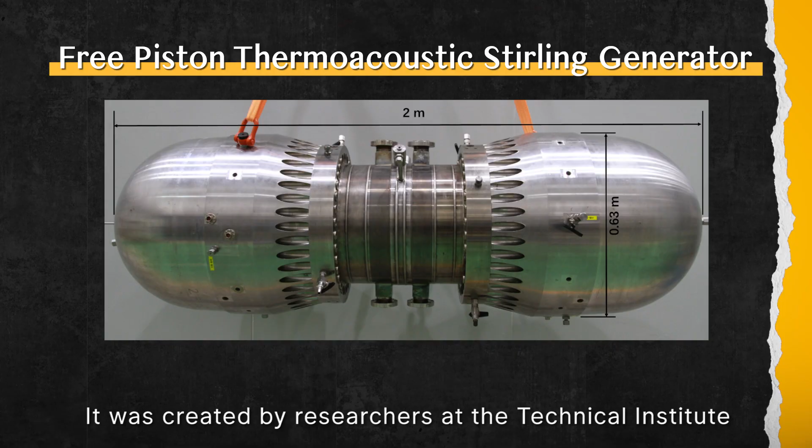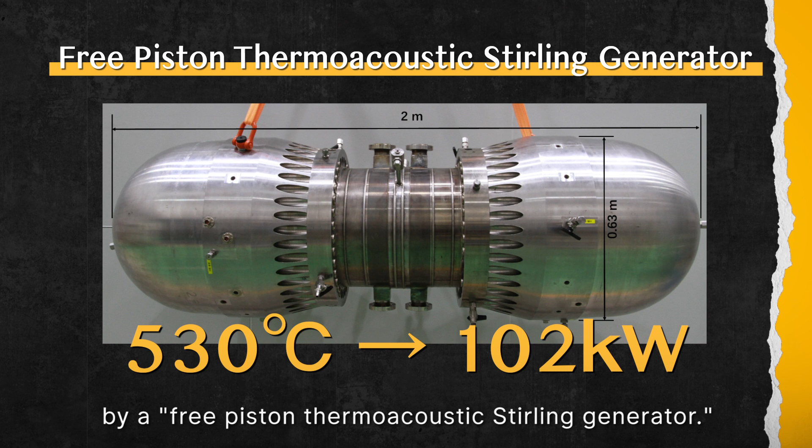It was created by researchers at the Technical Institute of Physics and Chemistry (TIPC) of the Chinese Academy of Sciences. In recent tests, their system delivered 102 kilowatts of electricity from a 530 degree Celsius heat source, the highest power achieved by a free-piston thermoacoustic Stirling generator. Its 100+ kilowatt capacity significantly expands potential applications from distributed power generation to aerospace.

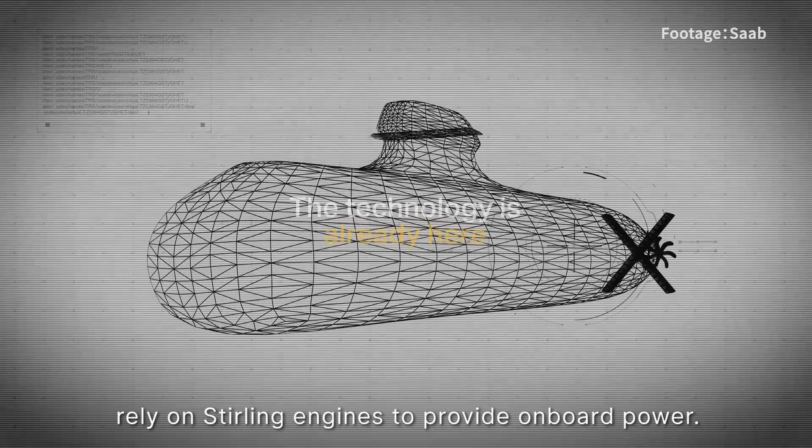The military, in particular, value this quiet and efficient technology. Sweden has successfully used this technology in its submarines. Meanwhile, China has also been working on developing Stirling engines for naval applications. Many modern submarines that use air-independent propulsion rely on Stirling engines to provide onboard power.

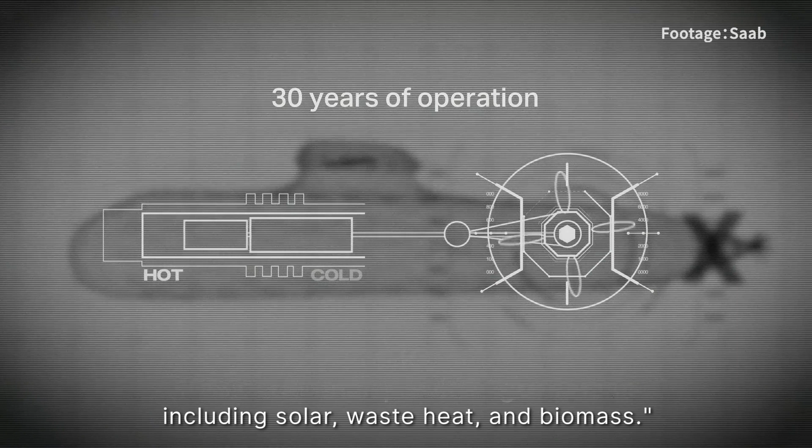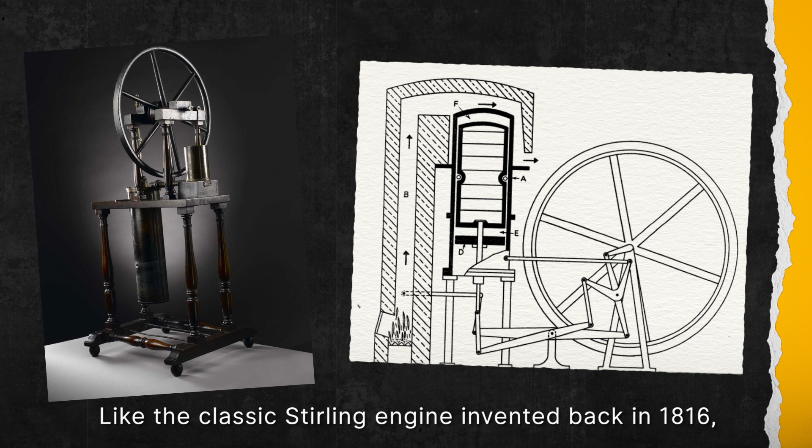Luo Ercang of TIPC noted it can utilize various heat sources including solar, waste heat, and biomass. Its flexibility and sustainability make it ideal for remote or portable use. Like the classic Stirling engine invented back in 1816, it's also a closed system that uses heat to generate power. But unlike traditional Stirling engines, it operates silently by relying on sound waves rather than steam or moving parts.

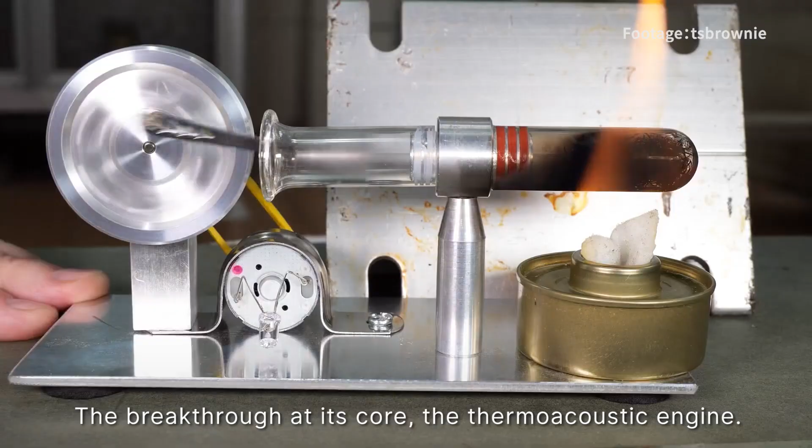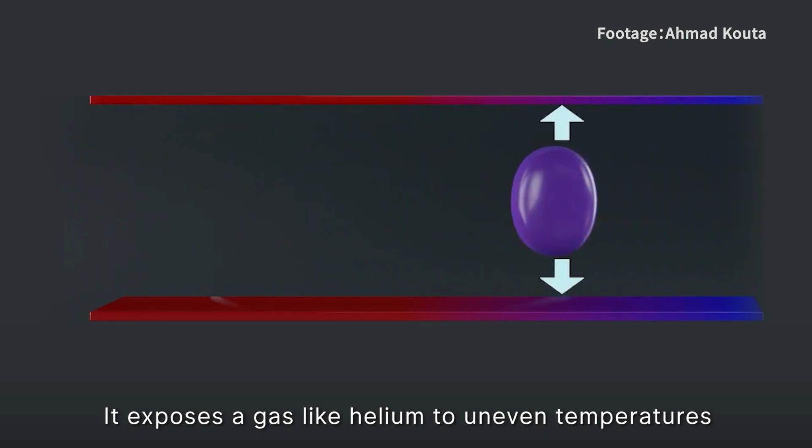The breakthrough at its core is the thermoacoustic engine. This engine takes heat and turns it into powerful sound waves using temperature differences. It exposes a gas like helium to uneven temperatures that cause the gas molecules to speed up and slow down repeatedly inside the engine. This oscillating motion of the gas is what generates the intense resonant sound waves that power the generator.

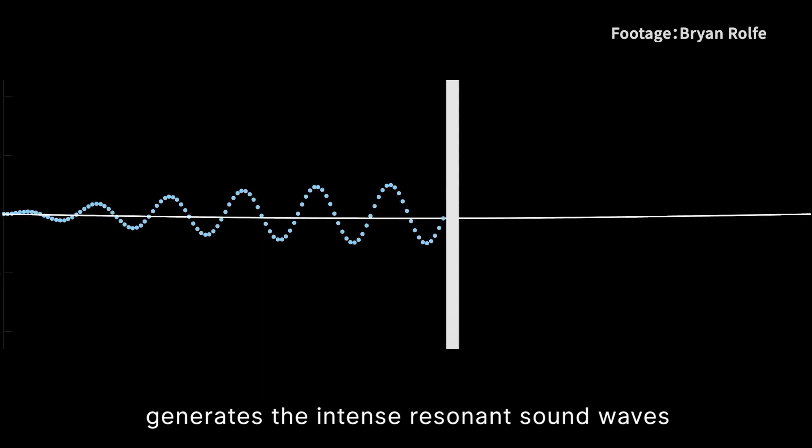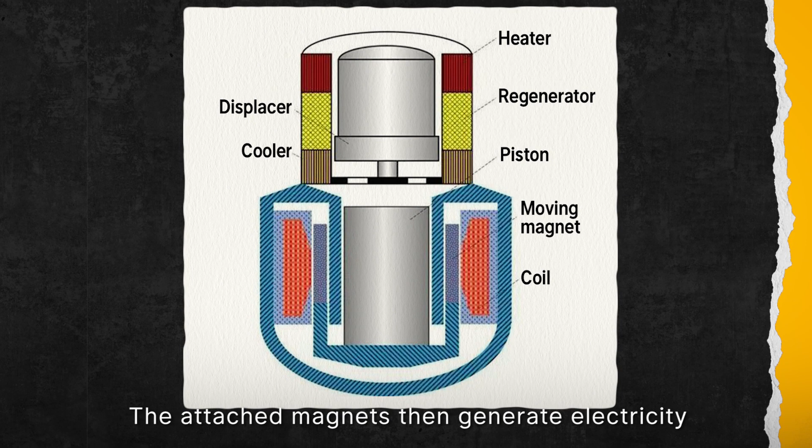The intense sound wave then causes the unattached piston, hence the free piston, inside to move back and forth in a straight line motion. The attached magnets then generate electricity as they shuttle through surrounding coils in the linear alternator.

Comparing to traditional Stirling engines and steam plants, the acoustic approach concentrates thermal energy into organized sound waves that can effectively drive the piston. The sound propagation transmits the energy.

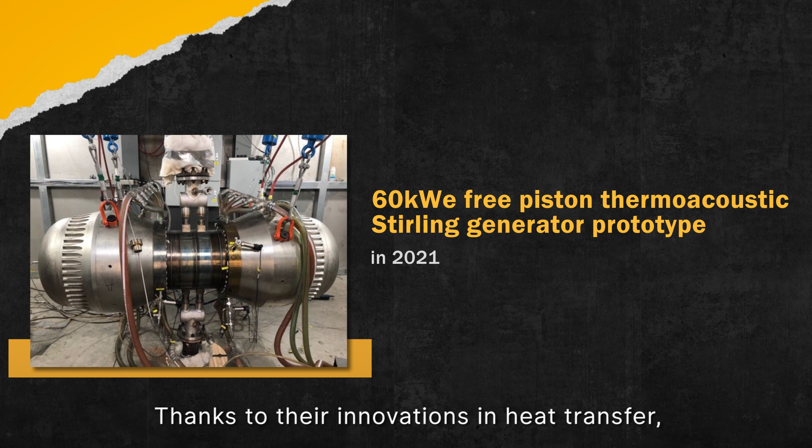According to Hu Jianying of TIPC, the current thermoelectric conversion efficiency is about 28%. If the heat source reaches 600 degrees Celsius, efficiency could increase to 34%. Thanks to innovations in heat transfer, gas sealing, and vibration control, the linear alternator was able to eliminate harmful vibrations while maintaining the vital airtight seal.

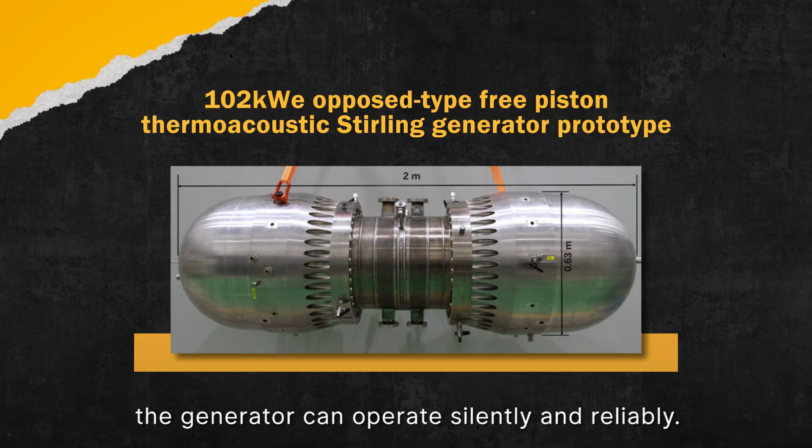Because the architecture is very simple, with little moving components, the generator can operate silently and reliably. While NASA patented a similar system, China has now gone further in translating this technology from concept to reality.

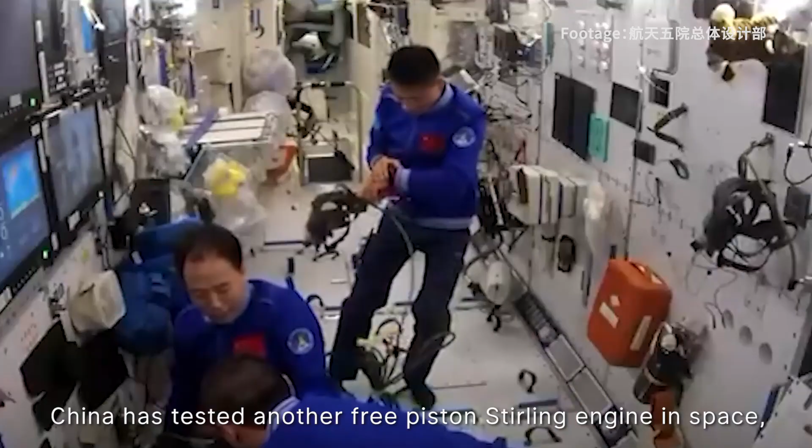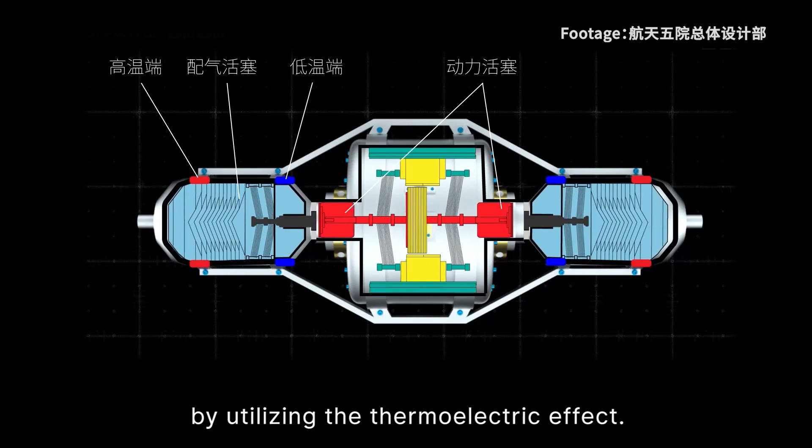At the same time, China has tested another free piston Stirling engine in space, trying to see if it can be a power source for space stations. However, the way this technology works is a little different from what we just described. Its full name is the free piston Stirling thermoelectric converter. It directly converts heat energy into electricity by utilizing the thermoelectric effect.

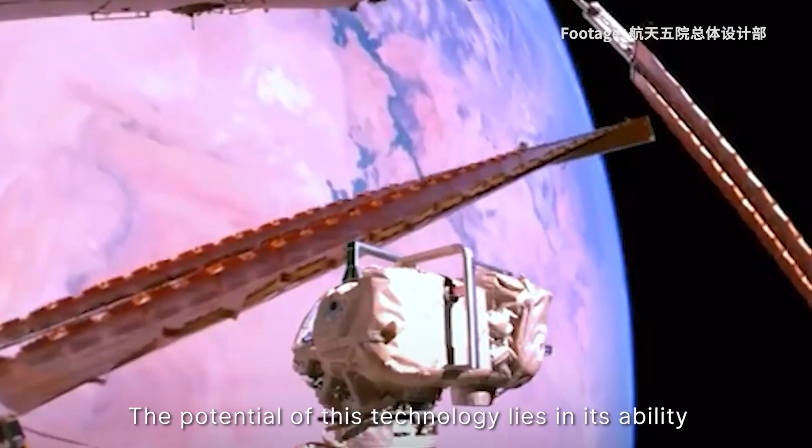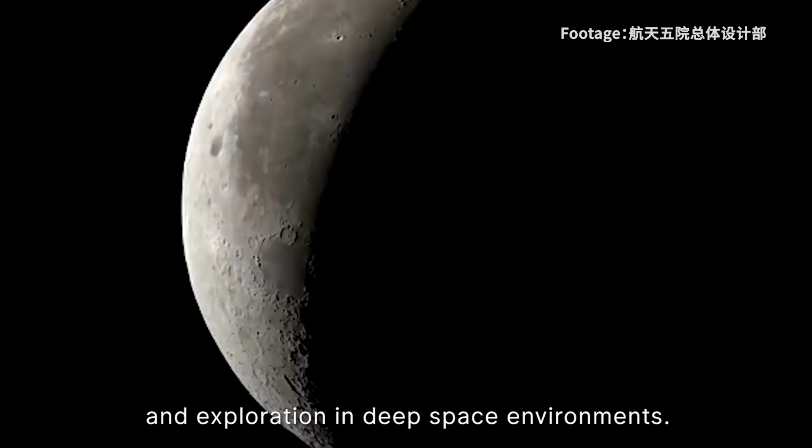During the test, the thermoelectric converter performed in a stable manner throughout the entire process and produced better than expected performance indicators. The potential of this technology lies in its ability to reduce a spacecraft's reliance on solar energy and offer additional power for upcoming crewed missions and explorations in deep space environments.

Previously, we introduced an AI robotic chemist called Xiaolai that can autonomously design, execute, and analyze experiments. It now has a new job: to produce oxygen from Martian meteorites. As humans, we dream about moving to other planets like Mars. The first step is to overcome the lack of oxygen in the Martian atmosphere.

Recently, the team from the University of Science and Technology of China, in collaboration with the National Space Science Center of the Chinese Academy of Sciences, used Xiaolai to prepare practical oxygen evolution catalysts from Martian meteorites, and they succeeded in producing oxygen. This remarkable achievement can potentially reduce the cost and complexity of human missions while enabling sustainable exploration by utilizing local Martian resources.

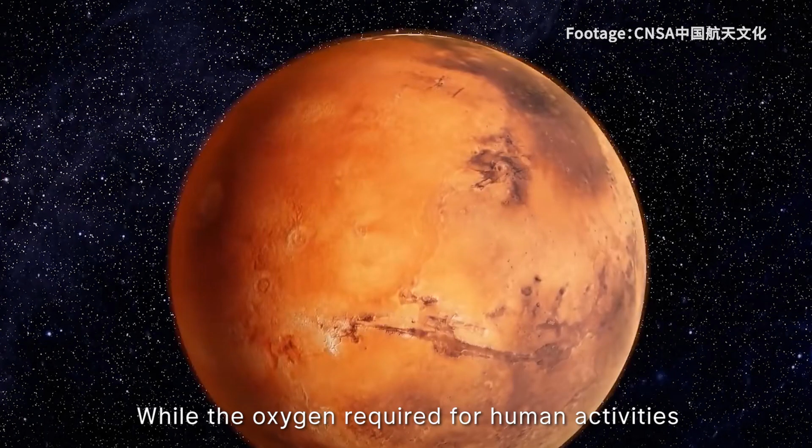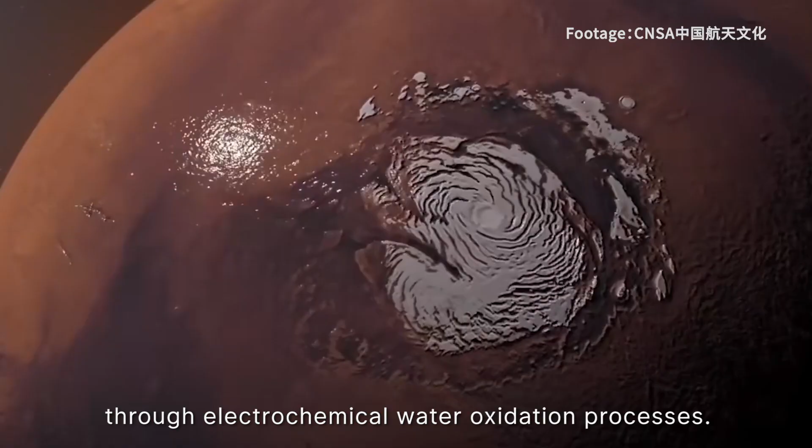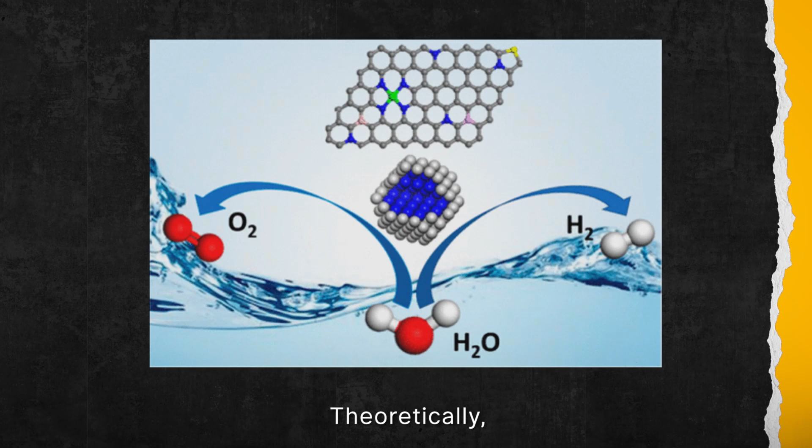While the oxygen required for human activities cannot be replenished in the Martian atmosphere, recent evidence of water activity on the planet has raised hopes for large-scale oxygen production through electrochemical water oxidation processes. This process relies on an oxygen evolution reaction (OER) catalyst to lower the energy barrier and make water splitting more efficient. Theoretically, solar electrolysis with an effective catalyst could yield fuel and oxygen using local resources.

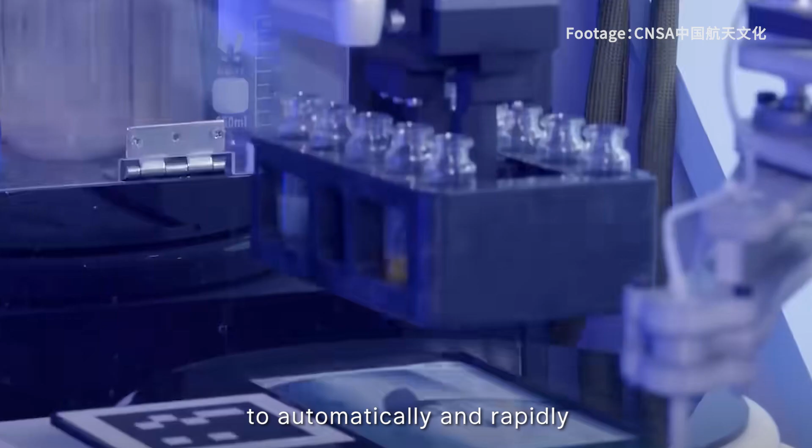Can this be achieved on Mars? AI seems to provide the perfect solution. Xiaolai analyzed the mineral composition of Martian meteorites using onboard laser-induced breakdown spectroscopy. It combines machine learning models with theoretical simulations and experimental data to automatically and rapidly identify the optimal catalyst formula.

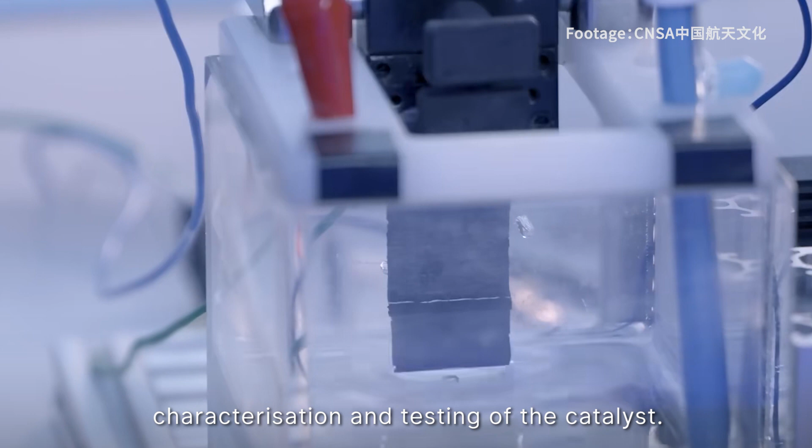The entire process is carried out by AI, from pre-treatment of the Martian ore to the synthesis, characterization, and testing of the catalyst. It then ran 243 experiments on its own over a 6-week period. The optimal catalyst formula was identified from over 3 million possibilities, which could take over 2,000 years if human chemists relied on trial and error.

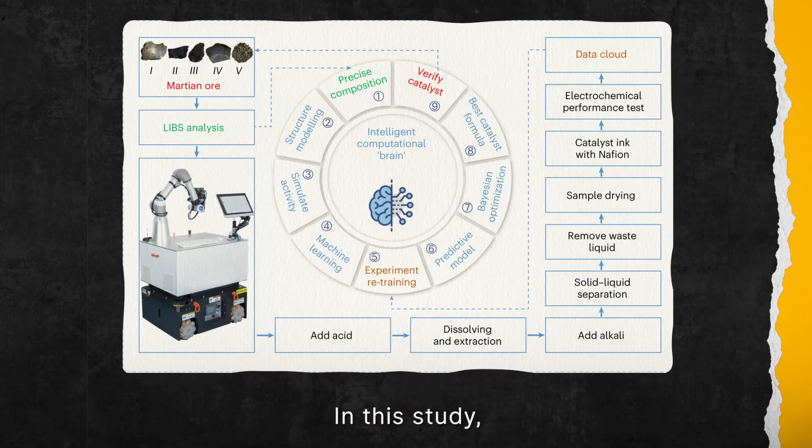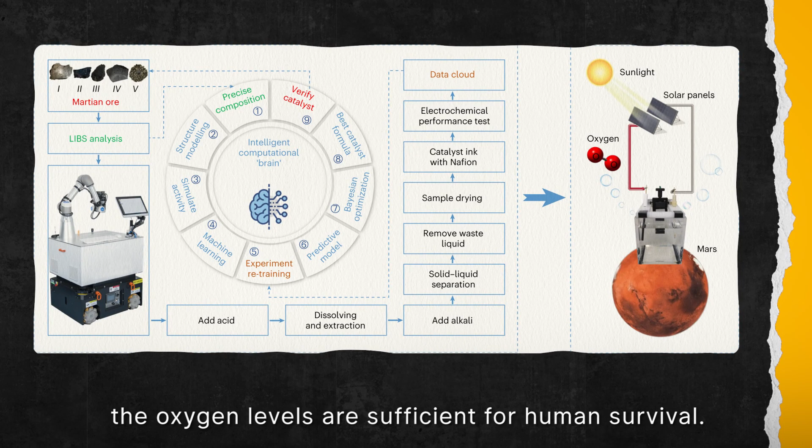Producing oxygen from native Martian materials represents a pivotal step towards building habitable areas on Mars. In this study, the team simulated Martian conditions to the maximum. With Martian catalysts covering the roof of a 300 cubic meter module, after 15 hours of solar power electrolysis, the oxygen levels are sufficient for human survival.

It seems that this breakthrough AI technology is bringing us closer to sustainable exploration and settlement on the red planet.